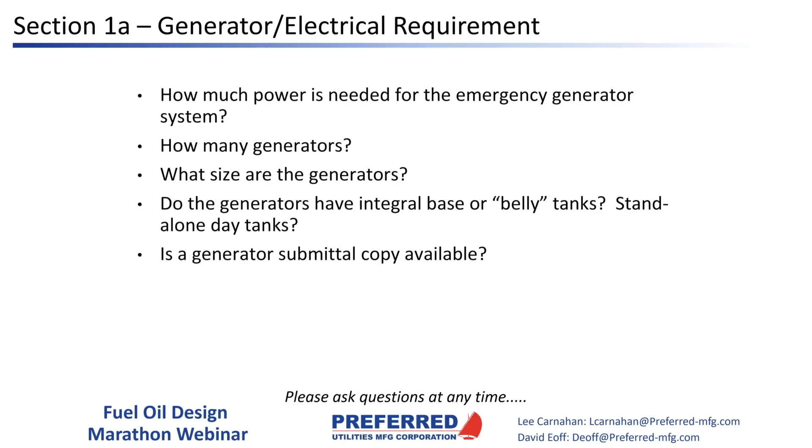And a very valuable piece of information in the submittal copy a lot of times is information about the belly tank. Belly tanks are becoming more and more popular, and we'd like to see the actual belly tank drawing if possible, because that tells us how deep the belly tank is. In other words, what kind of sensors we can use, how big the bungs are, how many extra bungs there are, etc. So as early as possible on the generator submittal is actually quite valuable. So we usually are going to ask you for that up front.

Next thing being the runtime requirement. Basically, how long do we need to run the system? Life safety is, I'm sure most of you know, usually about 8 hours minimum. Hospitals are generally these days going to be 72 hours. Data centers usually, I mean, we've seen 24 hours, we've seen 72 hours. I would say a lot of the ones we're working on these days are at least 72 hours. We've worked on ones that have been 10 to 14 days.

So it really depends. Actually working on a project right now that has not been design complete yet, but we're looking at running generators for multiple months. And in Florida now, nursing homes are required to have 120 hours of fuel storage. So it really just depends on where you're at in the country or where the facility is at.

Depending on the scenario, fuel trucks may or may not be running. Say a natural disaster like an earthquake - it pays to be cautionary to that kind of situation, because you may have a response contract with a fuel supplier that says they'll be out there within 72 hours to refill your tanks. Well, a lot of that can change.

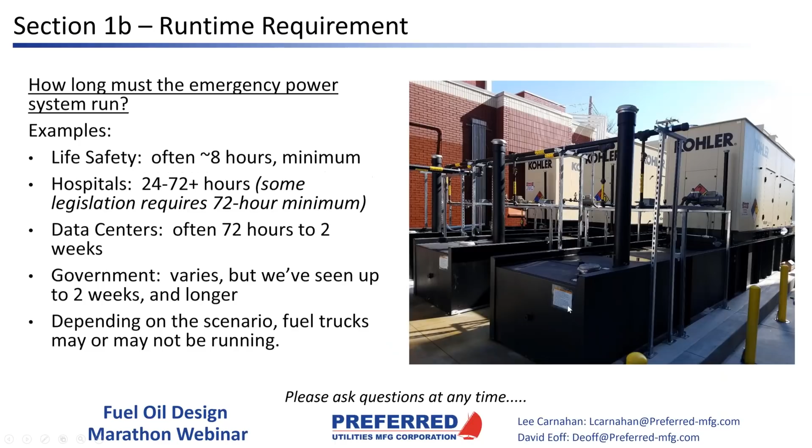I apologize for that, my mouse is a little bit sensitive. I won't use that anymore.

The next thing we're going to look at is above ground versus underground tanks. As you can see, there are advantages and disadvantages of both. It really is just which one is more appropriate, but above ground generally is simpler, it's less expensive, it's a little bit quicker, and it's obviously less disruptive to the site as far as excavation goes.

There generally aren't going to be any significant thermal issues, but it could happen in really extreme climates. Part of the limitation here is limited capacity. You can get approval to do much larger than 48,000 gallons, but generally 48,000 gallons aggregate is the limit.

We've run into sites in the past where neighboring sites, such as residential areas that have two-story houses that can see over fences, like at VA hospitals and stuff, we've run into situations where people have been sensitive to having exposed fuel tanks, and so that might be a reason to move to an underground tank as well.

Underground, obviously, is a lot more complex and more expensive. The complexity in California in particular is quite a bit different. We have AB 2041, LG 113, a lot of different codes and everything that need to be followed, and obviously very different equipment. They're also a little bit more difficult to inspect. Maintenance requires certified inspections by certified individuals, etc.

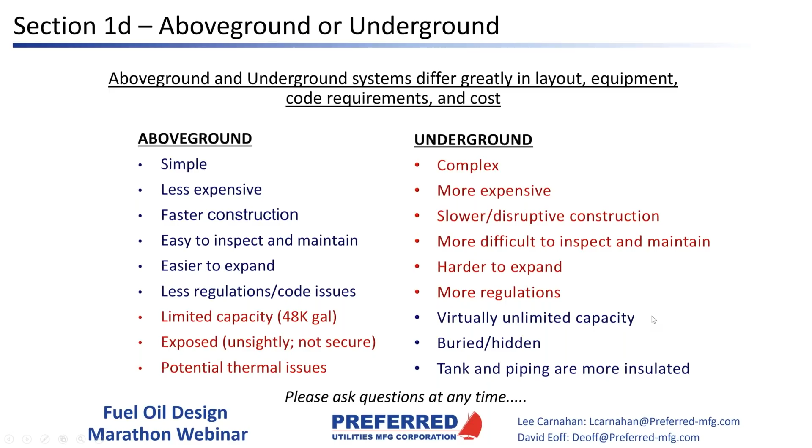They're generally a little bit harder to expand. So if it's a modular growth type of thing, above ground's a little easier. Obviously also more regulations, and the advantage though is that you have virtually unlimited capacity. They are hidden, and the tanks and piping are more insulated from extreme environments. So again, it's just really going to be what is more appropriate for your particular project.

Lee, isn't it true in a lot of cases the decision of above ground or underground storage tank has already been made by the time the project gets to the engineer? I would say probably most of the time, but in some cases not so much, especially if it's a remote site that's, say, a new data center. Sometimes there's some flexibility there, but we've also switched from above ground to underground or vice versa in densely populated, like downtown areas where it ends up just not working. We just can't do it for some reason. We can't excavate that particular sidewalk, or we can't block the street, something like that. So yeah, generally I'd say it's usually mostly decided ahead of time, but sometimes it switches up.

Has that been your experience a little bit here and there? It seems like I do more hospital projects than data centers, and it's usually the architects that decide early on in the project where the main tanks are going to go. Yeah, for sure. And I found if people complain that the main tanks are ugly, sometimes they'll put the logo of a local sports team on the side of the tank, and then people consider them to be less ugly. Yeah, we've had a couple of VA sites that have put decals and painted the entire tanks and made them look pretty nice. So yeah.

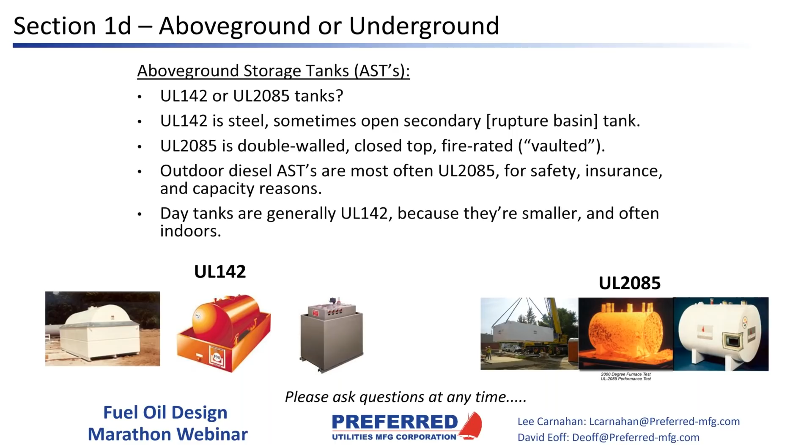Day tanks are generally UL 142 because they're smaller, usually indoors or often indoors. A good rule of thumb here is UL 142 is generally going to be up to 660 gallons, usually used as day tanks. When you go over 660 gallons, you're usually looking at UL 2085. Also, if you're exceeding that capacity and it's within a building, they're usually going to require UL 2085 as well. So a good rule of thumb is day tank under 660 gallons, or even a main tank under 660 gallons, UL 142 is okay. Once you go above that, in most cases, it's going to be UL 2085, protected class tank.

I'm going to try and go a little bit quicker, so if I'm going too fast, let me know. Underground storage tanks are going to be double wall these days, either fiberglass double wall or composite, which is a steel primary and fiberglass secondary. Pressure systems, some states, like California as an example, where I am, require continuous monitoring systems for tanks and underground piping. That's the pipe interstitial as well as the tank interstitial.

Fiberglass tanks are going to be monitored generally by brine or polyglycol, and composite tanks are usually going to be continuously vacuum monitored. The piping in the state of California, for example, the secondary will be continuously vacuum monitored in most cases.

As far as sumps go, in California everything needs to be double walled if it's a pressure type system, meaning you've got pumps in the tank pushing the fuel out. In other systems that are suction, if we have a length of pipe that's underground, we can use single wall sumps because that is the secondary containment for the piping. There are a lot of variations, and I know everybody's from all around the country, so I'm not going to go into too much depth on the particulars, but we will assist you with making sure your system is appropriately contained for your location.

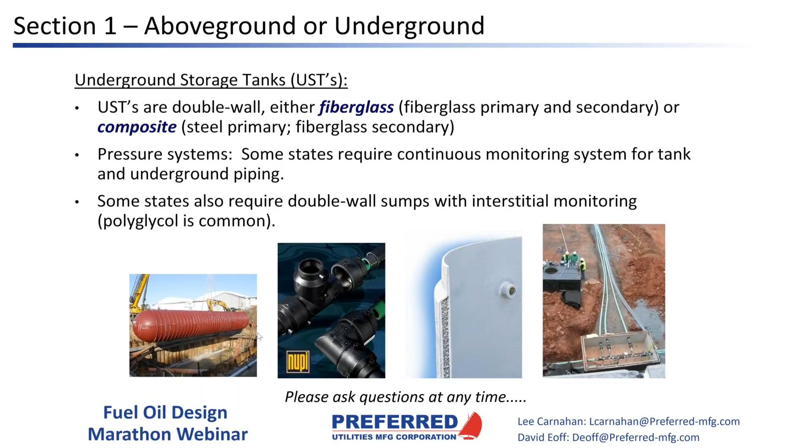So component locations - basically where are the ASTs or USTs located on the site versus the locations of the generators or the polishers, the controllers, etc. How far do we need to run the pipe? And of course, are we intersecting any roads or sidewalks? Do we need to go underground, overhead, that sort of thing.

And also, of course, if this is a high rise with a generator on upper floors. Once we get up to a certain height, depending on the types of pumps we're using, we may need to actually switch the types of pumps we're using, or we may need to use an intermediate arrangement with mixing different types of pumps.

Without going into too much detail, basically gear pumps are going to push a lot of pressure, a little lower volume. Submersible pumps, like you'd use on a typical hospital system with underground storage tanks, move a lot of volume - they're high flow but won't push a lot of pressure. They won't push a lot of head feet to get up to upper floors. So that's another thing we're going to be looking at as far as where these different components of the system are located.

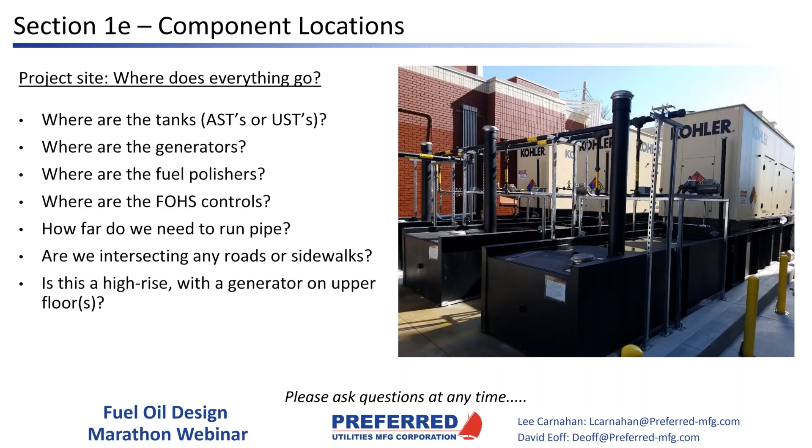So section 2, you want to take over here, Dave, for a little bit?

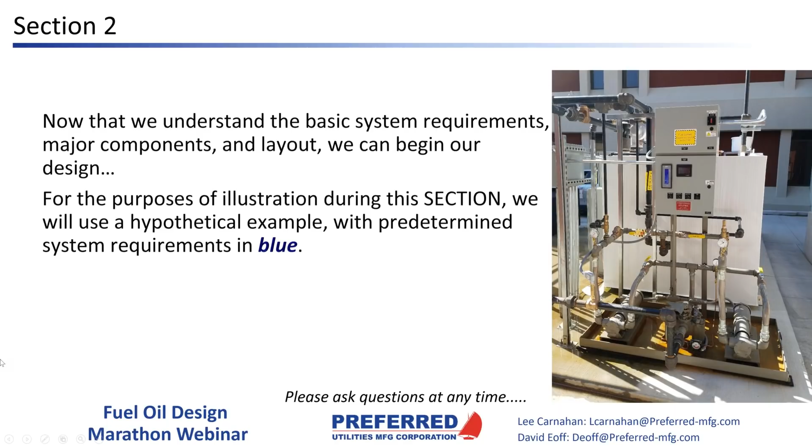Sure, go ahead and advance the slide. We're going to go into some detail of where these components should be installed, and the way we're going to do that is by going into some fuel schematics and building up a fuel schematic one step at a time.

But we're going to start with working through an example of how you would come up with the amount of fuel you need for a storage system. Lee talked earlier about how the amount of fuel you're required to have on site can be dictated by state or local code, company policy, or it could be up to the engineer. In this case, we're going to use 72 hours as our desired runtime.

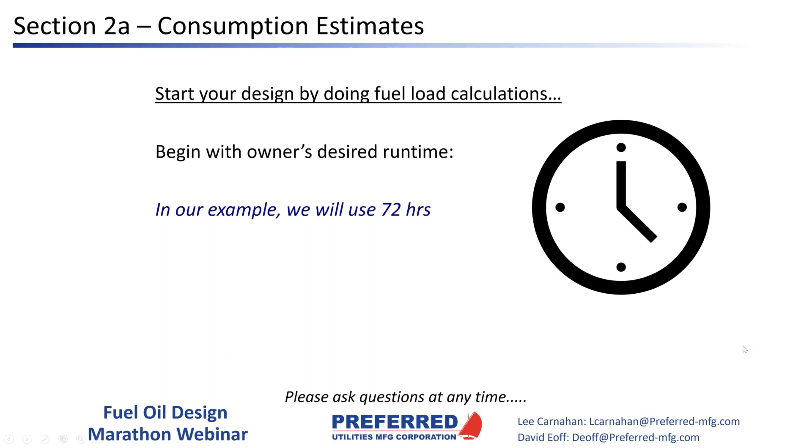I apologize, I don't know why it's not advancing. Just give me a second here. Okay, there we go, sorry about that.

So in this example, we've got 4 2-megawatt diesel generators and a runtime of 72 hours.

Now there's a handy formula for determining how much fuel consumption you're going to have with each generator.

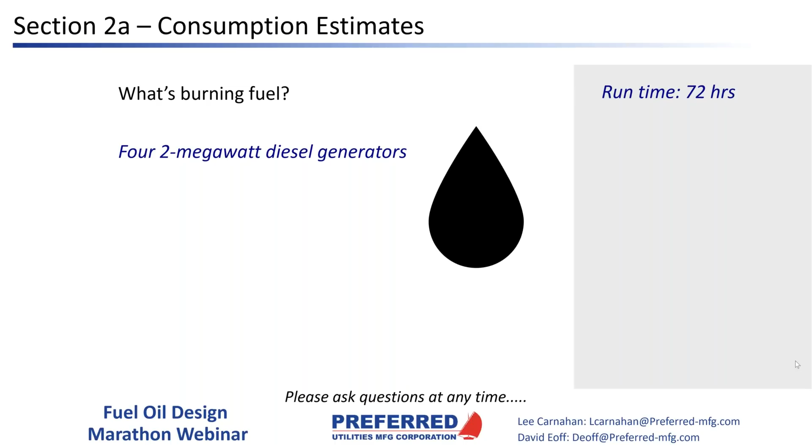There we go, sorry about that. I don't know why it's not advancing. There you go, all right.

The rule of thumb is 7 gallons per hour per 100 kilowatts. Or, I seem to like the math better - I just take the watts and multiply by 0.07, and that gives me the gallons per hour. The cool thing about this conversion is it doesn't really matter what type of generator or who the manufacturer is - they're all going to be pretty close to 7 gallons per hour per 100 kilowatts.

Well, there we go, sorry.

So each of our 4 generators is 2,000 kilowatts, and using our 7 gallons per hour per 100 kW, you get 7 gallons per hour times 20 is 140 gallons per hour per generator. So each generator is going to consume approximately 140 gallons per hour.

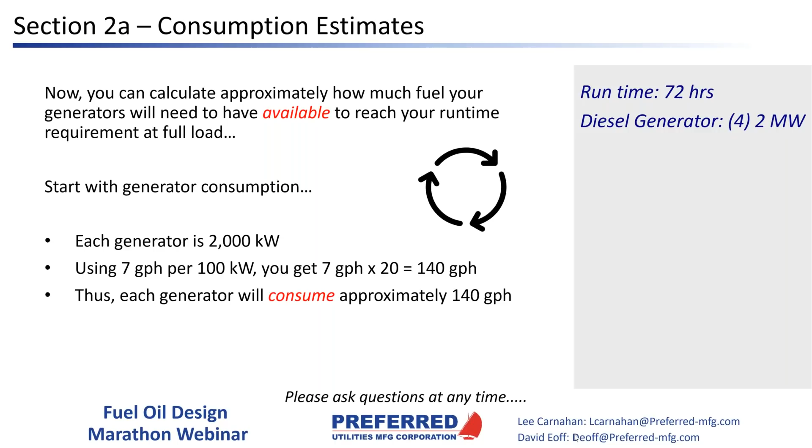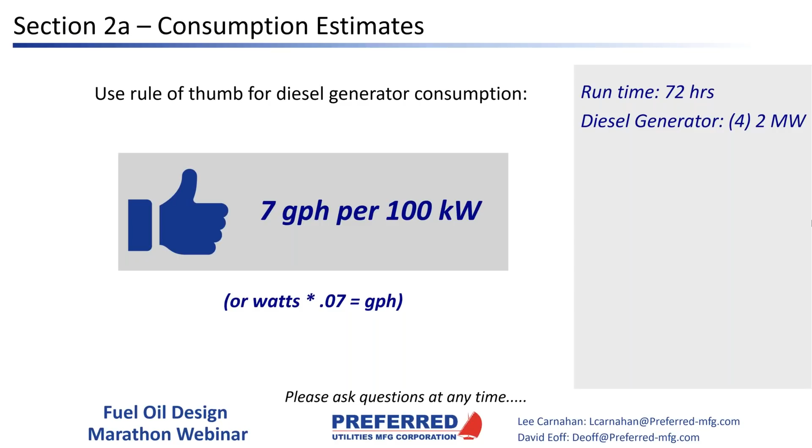Dave, I'm going to hand over control of this to you because for some reason it's funky when I try and advance the slide. Okay, I'm not even sure it's going to let me advance the slide since you're the presenter.

The perils of live slideshows. I know, we usually record these things, and now I know why. My standard in the past was I always wanted to have better technology than the Joe Biden live webinar. And usually we pull that off, although it didn't seem to hurt him any in the long run, did it?

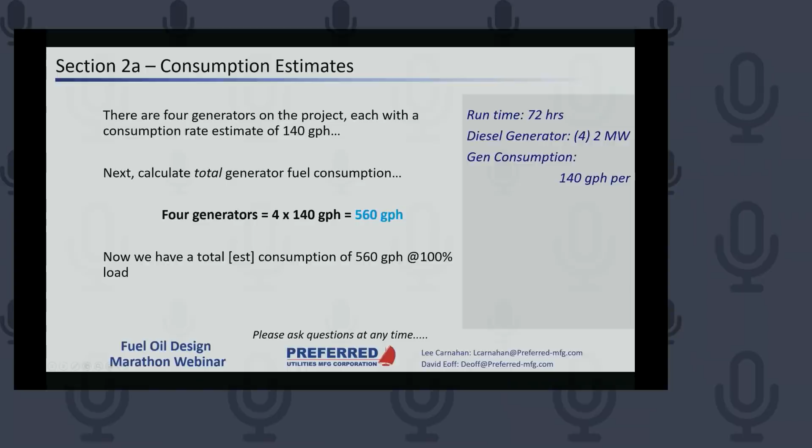This is going to end up being you're going to have to launch the presentation and everything. So yeah, that's why I'm stalling. I've got the presentation going on my screen now. Are you good, David? I think so. Okay, we'll see if my enter button works. If you need a couple seconds to get stuff, we have some questions, just let me know. All right, I'll tell you what, we'll work through this section and then we'll take the questions we have. Okay, great, we'll leave you in control of the presentation too from now on. All right, we'll even see how that takes over.

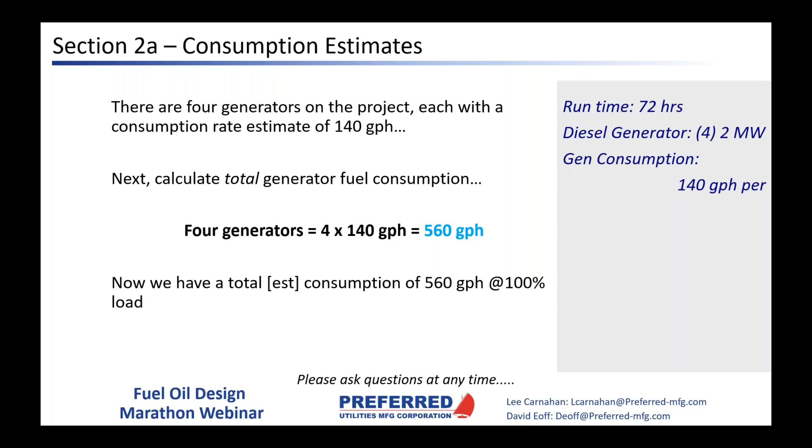Okay, so in the previous slide, which seems like days ago, we calculated 140 gallons per hour per generator times 4 generators in our example. This is math I can almost do in my head. We're up to 560 gallons per hour of total consumption.

All right, my enter button works. So now 560 gallons per hour times 72 hours is 40,320 gallons. And we're almost there. We need 40,000 some odd gallons of usable available fuel.

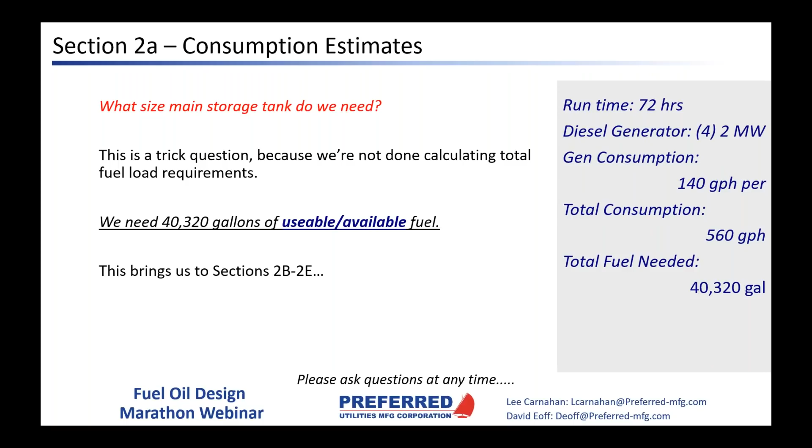That doesn't mean you can go out and order a 40,000 gallon tank, because there's two things. There's ullage - I think that's the right way to say it. You can't fill a main tank up 100%. In most jurisdictions, the fire marshal is going to tell you you don't fill that tank up above 90%. And when they come out and inspect a new tank, they want to make sure that alarms go off and valves start to close when you get to 90%. So you can't use the top 10% in a main storage tank.

Also, the drop tube doesn't go all the way down to the bottom of the tank. We typically leave about 10% on the bottom of the tank. The reason for that is if you get any water in the tank, and these tanks are vented to atmosphere, so they will accumulate water. The water is heavier than the oil, so it's going to go all the way to the bottom of the tank. And the water can contain bacteria that will eat the oil and produce sludge, which is going to live right in the boundary between the water and the oil. So we want to keep that level below 10% so it doesn't get to the drop tube.

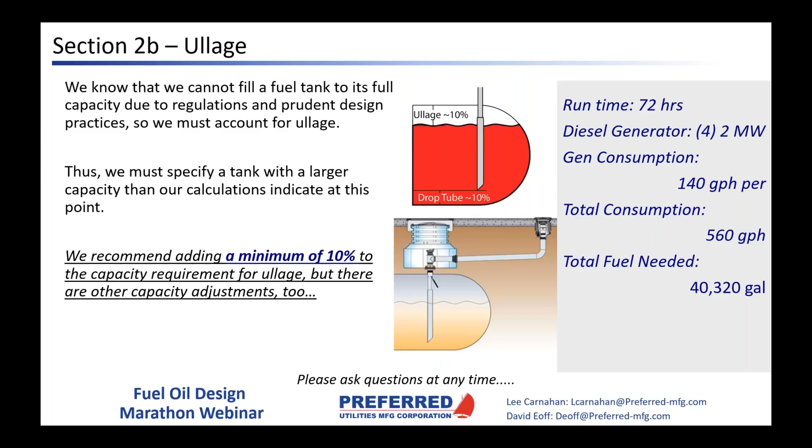By the way, if we do a filtration system or a fuel polisher, the drop tube for the fuel polisher will go all the way to the bottom of the tank, because that's where the water and the sludge is. But the drop tube for your transfer pumps usually stops about 10% up, so only typically about 80% of the total volume of the tank is usable. For the transfer pumps, the drop tube gap is usually about 6 inches. For the polisher, it'll go all the way to the bottom and end in a T, or sit about 4 inches above the striker plate.

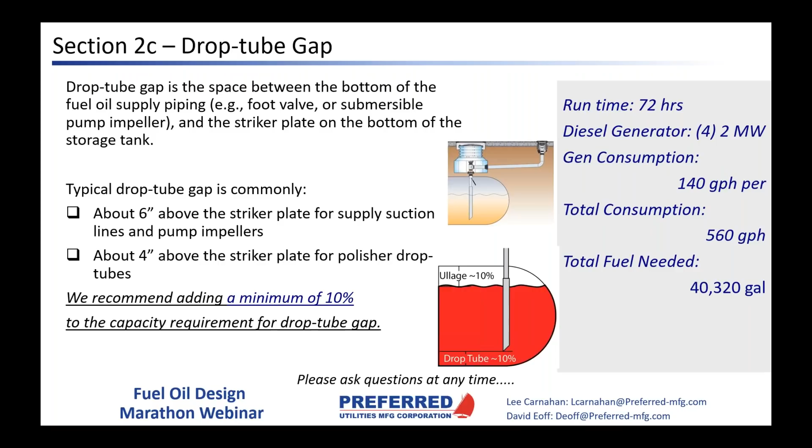You also get to use the oil stored in the day tanks as usable fuel as well. So if you're not quite up to your 72 hours or whatever is mandated at the plant's location, you can count the fuel in the day tanks towards your 72 hours. Day tanks are usually limited to about 660 gallons, but belly tanks on outdoor generators are virtually unlimited. I've seen belly tanks be 5,000 gallons, so that can be a significant amount of fuel stored right in the belly tank.

You need to be careful with this. There was a company in Dallas recently, a major calculator manufacturer. They had a fuel system for one of their buildings that had a large day tank and a small main tank. They filled their day tank, and then they had a truck come in and top off their main tank, so everything is full.

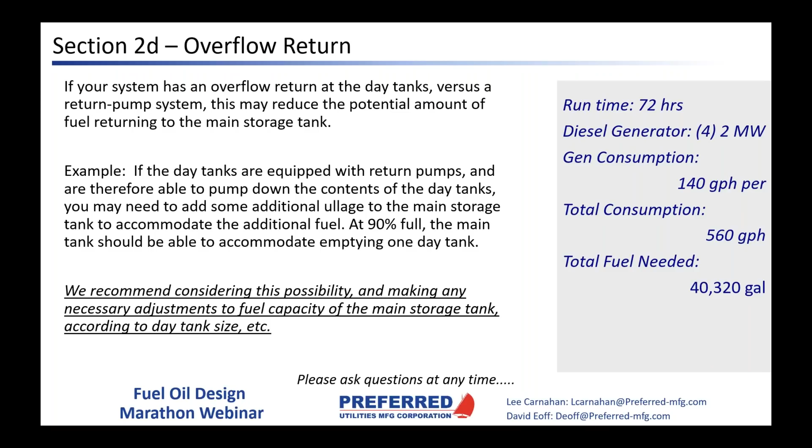Another thing to consider is that in some jurisdictions, you can't have what they call a wet fill pipe. Especially in high-rise buildings, you sometimes have to use a dry fill pipe. So after you've used that fill pipe to fill a main tank or fill a tank on the roof, you have to drain that fill pipe because they don't want the oil sitting in that fill pipe. So that volume has to be taken into account as well.

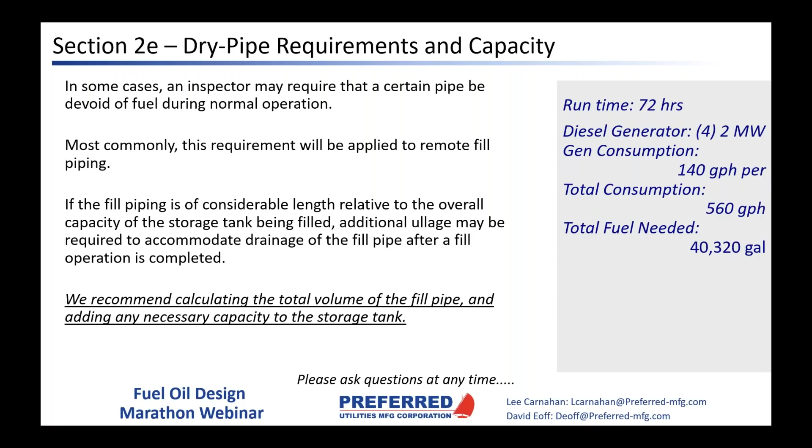So summing all this up, in our example, we needed about 40,000 gallons of usable fuel. We've got 10% of ullage at the top of the tank we don't get to use. There's 10% of the fuel at the bottom of the tank that we can't get to because our drop tube doesn't go all the way down. And then you might add 5% or so for generator testing or exercising the fuel system. In this example, that gets you up to 50,400 gallons.

Now, that being said, in an emergency, I don't think anyone has ever said that they had too much fuel. Our representative in Puerto Rico, Mario Franciscini, said he spoke to many facilities after Hurricane Maria, and a lot of them wish they had more fuel storage on site because it took a while for the roads to clear, and then even when they did clear, fuel truck deliveries were intermittent. So when possible, and when you have the space, round up.

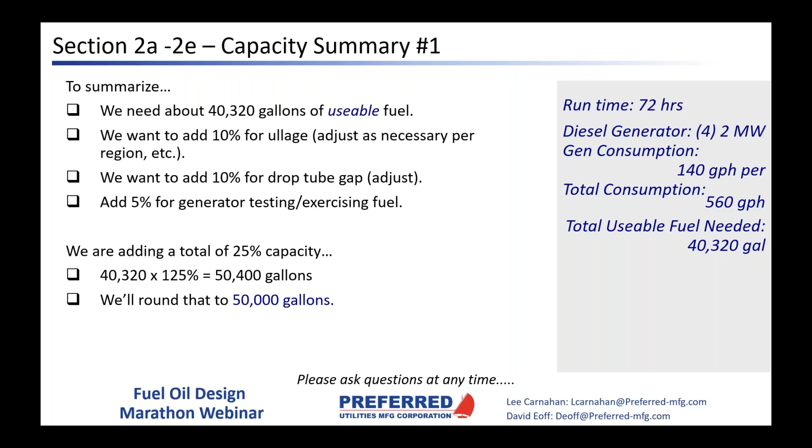So if you have large day tanks, you can use the fuel in the day tank towards your desired runtime. In this example, we're using 1,500 gallon belly tanks. So 1,500 gallons times 4 times 80%, because you can't get to 100% of the fuel in your day tank either, comes out to 4,800 gallons. To be conservative, I round that down to 4,000 gallons. Then instead of 50,000 gallons to meet your 72 hours, you would only need 46,000 gallons for a main storage tank. Although if it were me, I would probably round up anyway and get back to a 50,000 gallon tank.

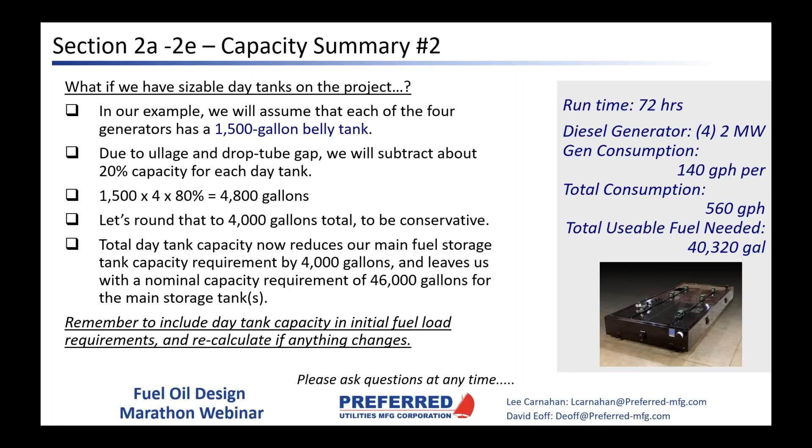All right, so hey, I just wanted to interject something real quick here. Some jurisdictions, like out here, we can go 95%, but I would still use the 25% number to make sure that you're well covered.

And I wanted to mention one other thing too, and that is, for example, OSHPD hospitals out in California, they need 133% nominal capacity. So I would keep that in mind. If you're working on an OSHPD hospital, we go even over and above the 25% extra. So I would keep that in mind. And then on top of that, of course, that's a minimum. So if you want to exercise your generators, we definitely want to throw some extra fuel on top of that, so every time we exercise the generators we don't have to order more fuel. We want to have some extra fuel there.

So that 133% is just a safety factor that OSHPD requires? Yeah. And I think it's an excellent idea.

I wanted to mention one other thing. One of the comments we've gotten in the questions section, Nicholas mentioned that Tier 4 data centers require 96 hours of backup. So that's a really good thing to know. If it's Tier 4, it's going to require 96 minimum. And again, extra fuel on top of that is great because that's the bare minimum. But I just wanted to say that was a good comment as well.

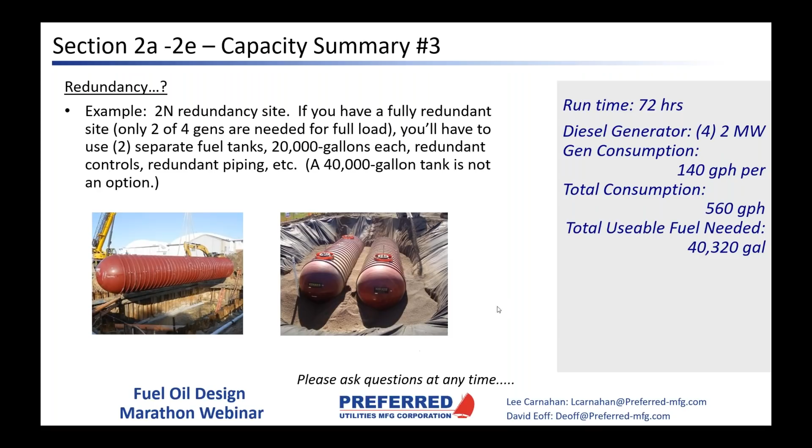Do you want to go over some more questions before we start? Keep going, David, or? Sure, go ahead. All right, so we did have another question.

It says, will an above ground tank with a UL 2085 rating installed inside a building be required to be installed in a 2-hour rated room? So if a 2085 is installed inside, is it required to be in a 2-hour, I'm guessing, fire rated room?

I would say generally yes, and you'd also probably have a size limitation, which out here usually is 3,000 gallons max. That's really a question that can vary - the answer depends on where you are and the authority having jurisdiction. That's one of the things they're going to want to weigh in on. Keep in mind, I'm from California, Dave's from Texas, so the answers you're going to get out of me are usually going to be the most conservative. So just take that with a grain of salt. Here in Texas, you can get away with a lot more. I mean, the oil came out of the ground, right? What's the harm of putting it back in?

Another question we had is, can you talk a little bit more about interstitial monitoring? So I know we talked about that earlier, but Lee, do you have any extra comments on that? Interstitial monitoring, there's going to be the interstitial on the tank.

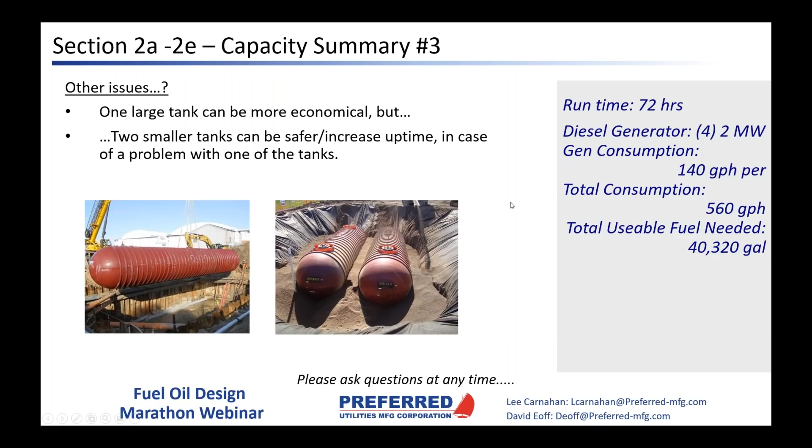If you lay this out in a data center type environment too, and loop it around, as long as you have a map of the cabling, you could pinpoint a water or an oil leak on a grid, and know exactly where, hey, there's a hole in the roof and it dripped through the false floor, that kind of thing. So it's pretty handy stuff.

So the next part of our example here is we're going to start looking at the piping layout, and a typical suction type system with an underground tank, which is not all that popular, but it does definitely occur. We definitely do these every year. A typical suction piping layout is you have a foot valve in the underground tank, and you're actually physically pulling the fuel through a suction line up into the pump set.

So there are things you want to look out for here. You want to make sure that you can maintain prime. A priming apparatus of some sort, like a priming tee, can be handy here. You want to make sure you have a good foot valve, and obviously a good pump set, usually positive displacement, that will be able to self prime and purge air and that sort of thing.

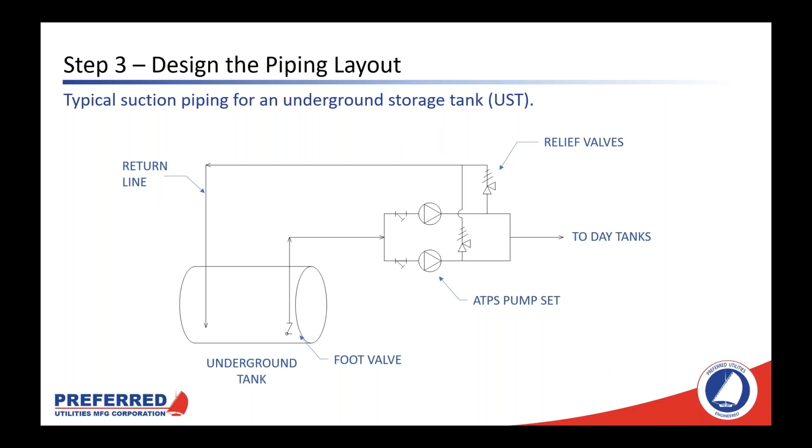At that point, you also have on the pump set a relief valve, which you can see in this slide as well. In case there's a blockage, somebody has a valve closed, or there's some sort of issue going on, the relief valve will tie the discharge of the pump set back into the return line to make sure that we don't overpressurize anything.

Above ground tank, very similar. You just have a little bit easier time as far as suction lift, but basically the same arrangement there. We're going to look at, of course, all the usual pipe friction loss and that sort of thing, but we're also looking at suction lift. Specifically in the case of having an AST above ground, where you've got the tank higher than the pumps, we have to have an anti-siphon valve.

This is often overlooked or inappropriately placed. The anti-siphon valves will only work on the suction line. So we have to literally orient the valve in a specific way, and the fuel needs to be pulled through the anti-siphon valve. There's not going to be any sort of anti-siphon valve on the discharge line, which of course makes sense. But they're going to be required on these AST systems.

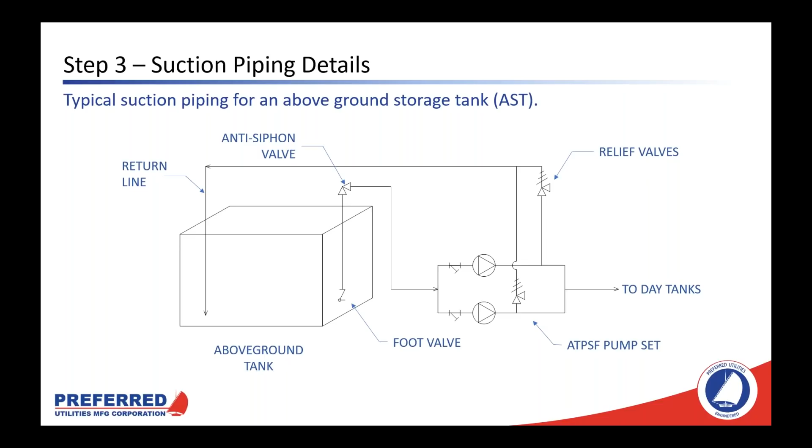You run the risk that if you get a leak in that fuel system, you can siphon oil out of the main tank. The leak could be something as stupid as a union that's not tightened up all the way, or a flange that's not tightened up, and that'll drip out and siphon oil out of the main tank. Every fuel tank, above ground or below ground, has fuel introduced or removed through a drop tube that goes down to the bottom of the tank. That creates an obvious risk of siphoning out the entire tank if that pipe were to break.

The only variation on that is if you have a physical day tank overflow. Let's say you've got an underground tank and you don't have return pumps—in order to prevent overfill, you have an opening at the top of the day tank, and a continuous downward slope back to the underground storage tank. In most cases, that's the only time where you're not actually introducing or removing fuel through a drop tube that goes to the bottom of the tank. So that's why we have siphon precautions.

So if we have multiple main storage tanks, it's basically the same arrangement, but we have motorized ball valves. Essentially, they're referred to as tank selector valves. This is a fairly popular solution. Many of you who are watching this have probably dealt with this and seen our designs on it.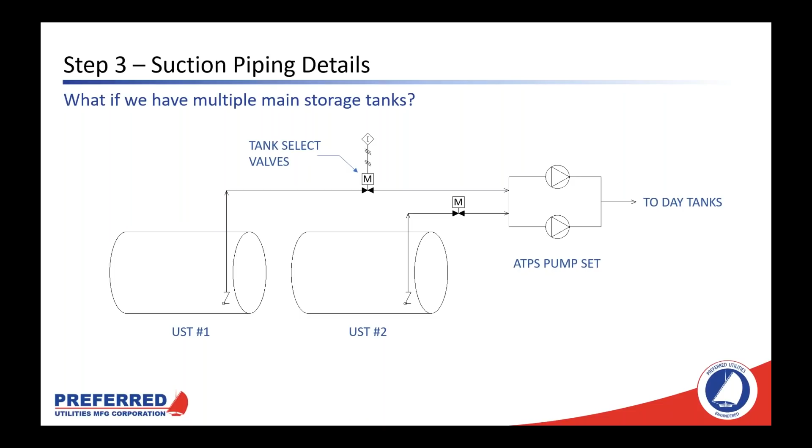So discharge piping, typically, from a pump set, will go straight out to the day tank. The flow switch, however, if it does not make when the pumps activate, that'll tell the controller there's a problem, there's a potential pipe break, something's wrong. In most cases, it will try and switch over to the lag pump.

It'll try the lead pump first in a duplex system. It'll say, hey, maybe the pump isn't working, I'll try the lag pump. If the lag pump fails, then it's going to send out another alarm. It'll say, okay, pump one failed. That'll be alarm number one.

The flow switch still doesn't make after the lag pump. It'll say, hey, there's a problem, you need to check this. Is there a leak in the pipe? Did somebody break the pipe with a forklift or something like that? Or did somebody just close the hand valve so that we can't move fuel? Did somebody shut off the ball valves altogether?

Yeah, I'll take this slide, Lee. Okay, so I've been doing this presentation for a while, or a version of it, and I realized I was leaving out a very important part - I hadn't drawn in the engine fuel pump, which is a really important part of the system. I've drawn it outside of the generator enclosure because it's easier to draw, but actually that fuel pump is inside the generator enclosure and attached to the engine.

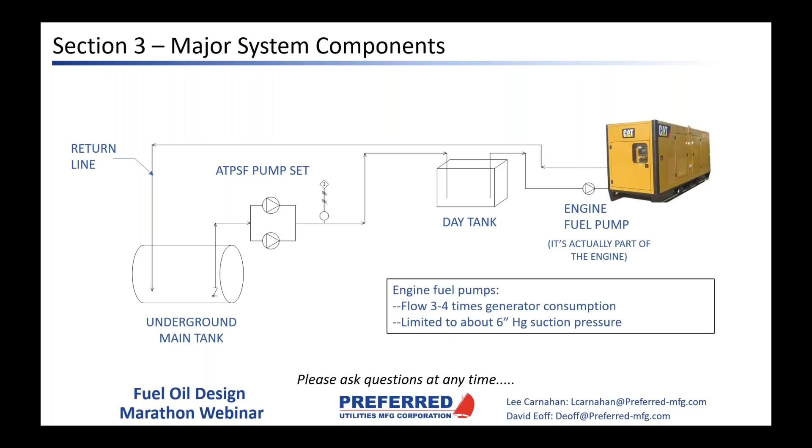And the only concern there is that now the transfer pumps have to keep up with all of your connected engine fuel pumps. So adding on to the fuel schematic, if we have more than one day tank, we simply put all the day tanks on a supply header.

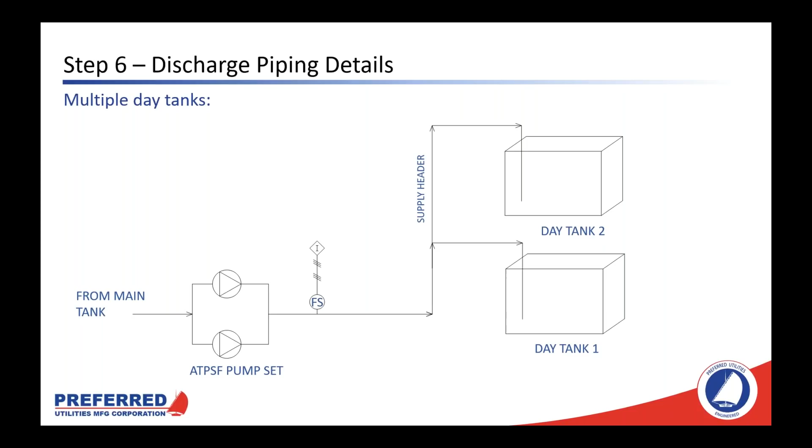So we're going to pipe them basically in parallel. And then to make sure we only get fuel to the day tank that's calling for fuel, each of the fill manifolds on the day tank will include at minimum a normally closed solenoid valve. The sequence is, when the day tank calls for fuel, we'll bring on a supply pump, we'll prove flow in the supply pump, we energize a solenoid valve for that day tank, and then we top off just that tank. And that fill manifold, sometimes it really is just a solenoid valve.

Often there's a 3-valve manifold around that so that you could bypass the solenoid valve. Sometimes there's 2 solenoid valves. Sometimes the 2 solenoid valves are turned into 1 motorized valve. You might have a Y strainer there. You might have a sight flow indicator to let you see that oil is going into the tank. And you might even have a flow switch there so that we make sure if day tank 1 is calling for fuel that we actually detect flow going to day tank 1, which is an important thing. We can do any of those combinations, but most common is probably just a solenoid valve with a 3-valve manifold around it.

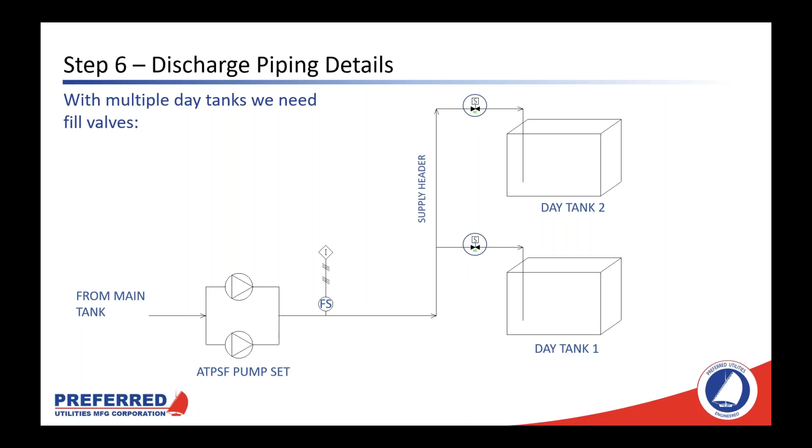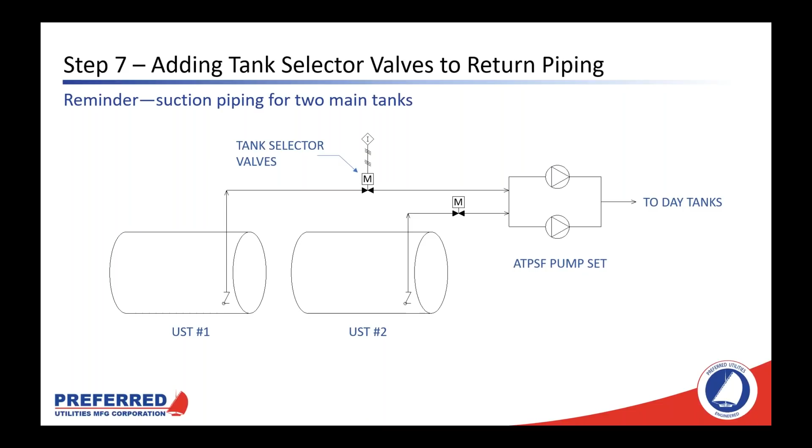So Lee talked about tank selector valves in the supply line. You also are going to need tank selector valves in the return line as well. And we highly recommend that if you're drawing from tank 1, that you're only allowed to return to tank 1. This makes the system somewhat intrinsically safe. And then what we'll do is, if the operator says, through our color touchscreen, if we're going to run on tank 1 today, we're going to line up the supply tank select valve and the return tank select valves for tank 1. Sorry, I'm in the middle of a webinar.

We like to use motorized valves because motorized ball valves are less likely to leak, and we can prove the position. There's a very large data center in San Antonio that had headered return lines and solenoid valves that leaked a little bit when there was pressure on the system, and eventually it leaked enough to fill a tank to 100% and overfill it. Fortunately, it was a 24-hour staffed facility, and the person on staff heard oil hitting the ground immediately, figured out what it was, and shut off the oil to that tank. So that's the reason why we usually like motorized ball valves in this situation.

We like to pull from and return to the same tank. It makes it intrinsically safe so that you can't overfill that tank. Some facilities want to use the transfer pumps to move fuel between main tanks, and we can do that, and we can interlock it to make sure that it's safe. But we would prefer to do it in more of an intrinsically safe system and not rely on a float switch to make sure we're not overfilling a tank.

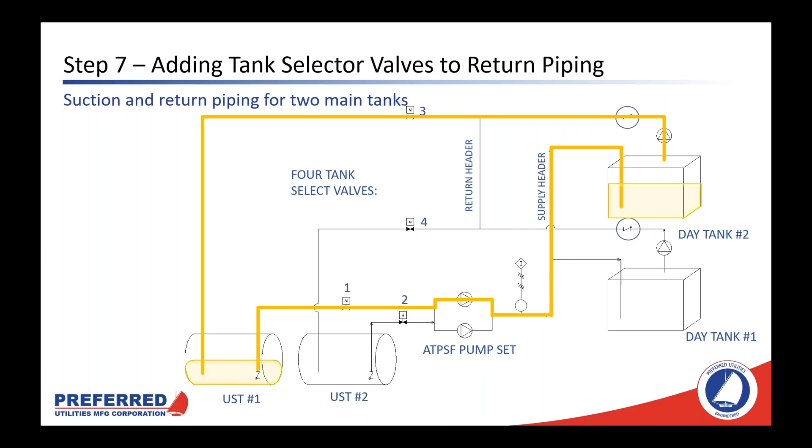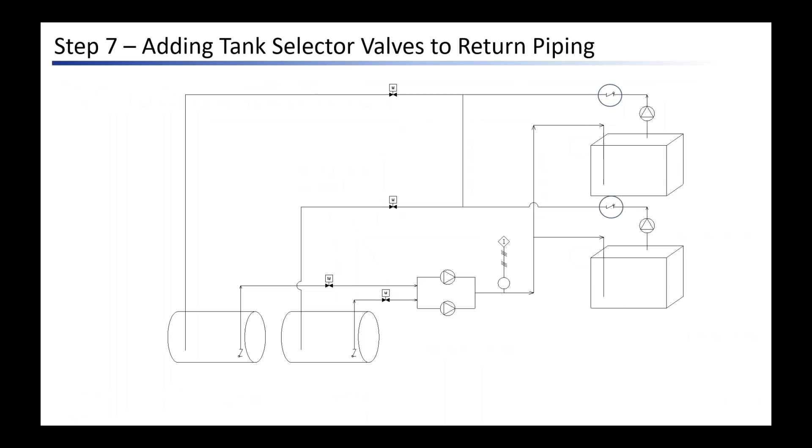Okay, I don't think there's actually any new information here on this slide. But our previous graphic artists figured out how to do these animations, and they're really cool.

You've got to be really careful about valves in the return line. The strict interpretation of NFPA code is you're not allowed to have any valves in the return line. But when you have multiple tanks, you need some way of directing fuel back to the correct tank. And when you have return pumps, you need a check valve there to make sure that you don't flow oil backwards and use the oil in day tank 1 to fill day tank 2. So we've got to be real careful about valves in the return line, and that's another reason why I like to use motorized valves, because the actuators have proof of open and proof of closure switches on them so that we can make sure our valves are lined up when we go to energize return pumps.

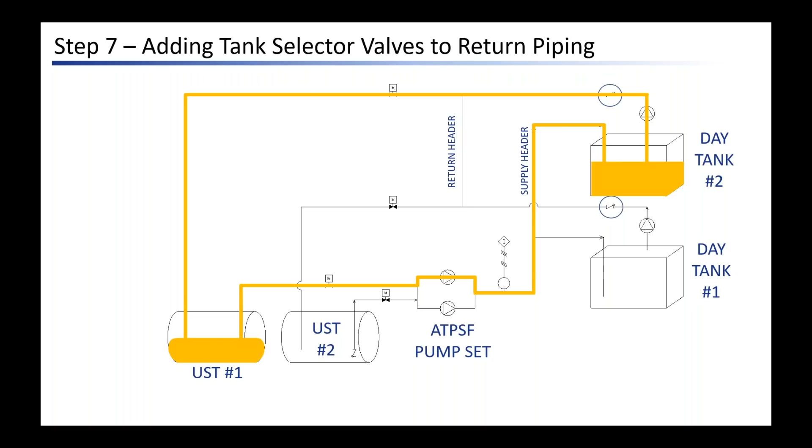This animation shows a typical control sequence. So the generator's using fuel. We typically put 4 float switches in a day tank - it's called a PLS4. The pump-on float switch is at 50% level. When you hit that 50% level, we open the fill valve to that day tank, energize the supply pump, prove flow, and fill it up to 80%. At 80%, we hit the pump-off float switch, and then your day tank is topped off and the fuel system just kind of goes into hibernation mode.

If you blow past the 50% pump-on switch and get down to the 40% switch, that's the emergency low. Now alarms start going off in our control panel and we energize both supply pumps because for some reason we didn't top off like we were supposed to.

And then on the other side, if for some reason we get past 80% full and go to 90% full, then the top switch in the PLS4 breaks. That sounds an alarm because it's an upset condition, and we will cut power to the fill valve shown there in the schematic, and we'll activate a return pump. When we cut power, it's actually a hardwired thing that can't be overridden by the operators. So if you've got a day tank that's 90% full, you won't get power to that solenoid valve.

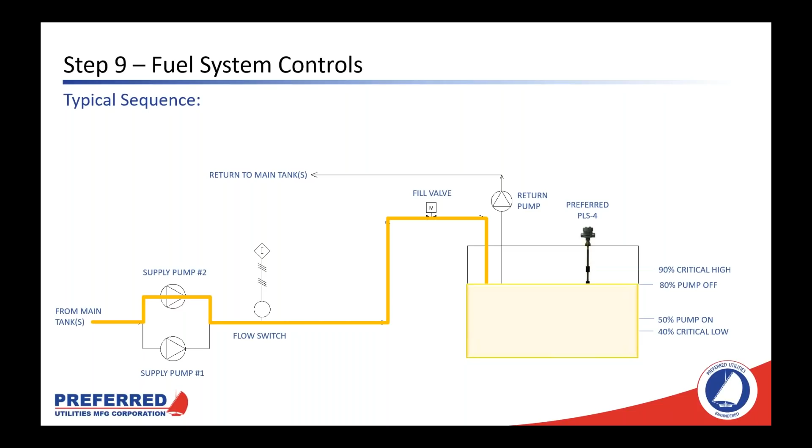I also do boilers, and for boilers we'd go back to a headered system like this, and we'd probably put a back pressure regulating valve on the end of that supply header to maintain the pressure we need through the whole supply loop. Boiler projects are usually simpler than generator projects, but the one difficult thing is some boilers have onboard pumps like generators do, and need oil between slightly negative to slightly positive, and the onboard pump on the boiler will just draw off of that header.

Some boilers have no onboard pumps at all, and then that supply header may need to be charged as high as 100 psi for a fire tube boiler, or even 150 psi for water tube boilers. So if you're not sure what the flow and pressure requirements of your boiler project are, just let us know the make and model number of the burner, and if we can't figure it out by Googling, we know people at all the burner manufacturers and we'll call them to find out the requirements of their burner or pumps.

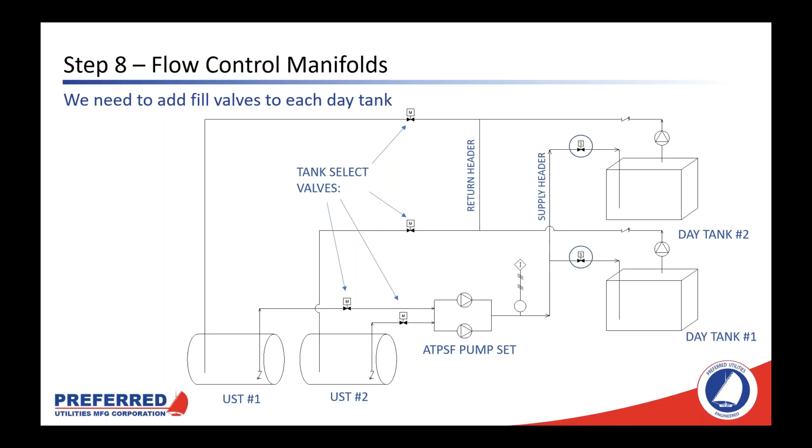Okay. Lee, go ahead and take it from here. I think these are the slides that you put together.

Okay, so at this point we're really going to start looking at the major system components now that we understand the layout, the piping, and that sort of thing. Depending on what we select here, this can affect the need for different types of subsystems, code compliance requirements, etc. Once we start selecting some of these components, that can affect subsystems like priming, suction lift, fuel velocity, etc. We haven't figured out the whole system yet — once we put the components in there, that can make changes.

For example, like Dave was talking about, returning the fuel back to the main tank versus back to the day tank is going to change things. It's going to change the size of the pumps, etc. So once we go into this, we may make some changes. Dave, you're still advancing the slides.

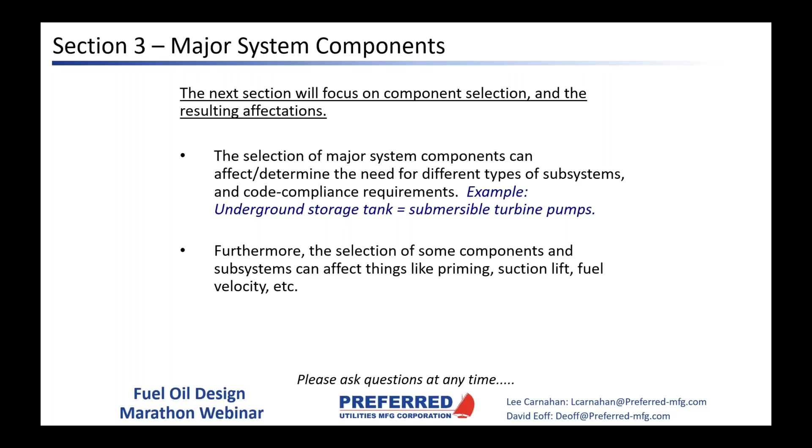First thing is we'll look at gear pumps. As I mentioned before, I'm not going to go into too much detail here. Gear pumps tend to be higher head, lower volume in general. You can certainly have high volume gear pumps, but these are really good for pushing fuel up to higher pressures. Like Dave was saying, on a boiler system that requires higher pressure, we need to use something like gear pumps. Also for remote fills or for shooting fuel up to a rooftop — could be 100, 300 feet — that's a good application for gear pumps.

They do require a suction line, so we've got a few different components there. We've got a foot valve, a suction line, and we may need an anti-siphon valve on that suction line because the fuel tank may be higher than the components. Since we've got that suction line, we have to achieve and maintain the prime.

So it's a really good idea in most cases to install a priming tee. A priming tee, for the most part, just consists of a high point in the piping where we put in a T that points upwards with a nipple, a ball valve, another nipple, maybe a cap, so we can unscrew the cap, open the ball valve, maybe spin on a funnel, and literally pour some diesel fuel into that suction pipe in order to prime it, or 'burp' the pipe, to get the air out of it.

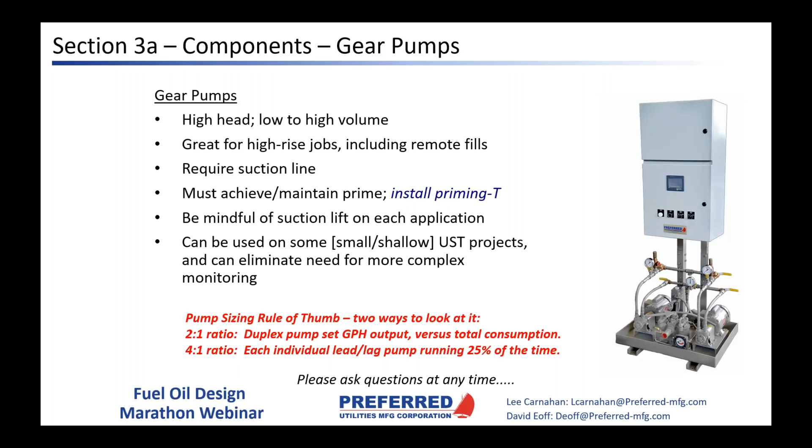Yeah, I should probably change that slide, it's my fault, but I said on small or shallow UST projects we can do suction systems. On larger underground tanks it's possible too. We're going to do some very careful calculations, mix and match pumps and motors and that sort of thing. So I should probably soften that last part of the last slide. We can do it on some of the larger systems, it's just a matter of being very careful and going through some pretty serious calculations.

You can use our online pump and pipe sizing program to estimate the suction at the pumps, whether you have an AST or a UST system. We're happy to also go over that with you and do any more calculations or anything, if that makes you more comfortable as well. We can certainly assist with that directly.

So obviously the other big pump selection possibility here are submersible pumps. The nice thing about submersible pumps, there's no priming issue. The impeller is actually submerged in the fuel, so it's always pressurized anywhere outside the tank, or at least the supply line.

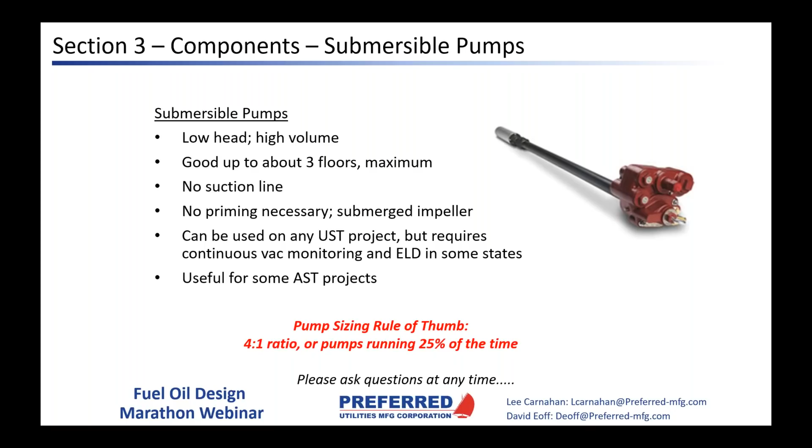You know, based on effective and efficient piping, pumping, but also could be a situation that's just a matter of real estate or something like that, or protection of the component. So we're going to take all those things into mind and make the right decision on what type of pump to use.

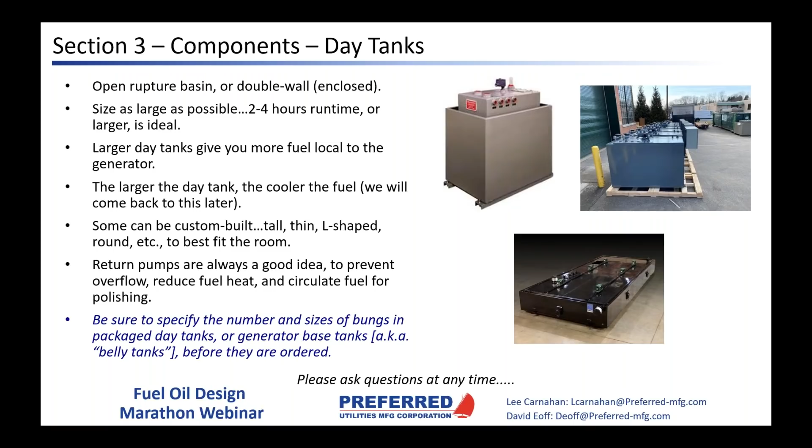So they're super convenient from a real estate point of view because they don't increase your footprint anymore, but they can be difficult to integrate with the rest of your pump controls. Yeah, that's an excellent point. We do run into that a lot. And I would say, my preference is try and get, that's why we like to see the generator submittal so early in the process.

Try and get as many bungs as possible so that we have spares. It's definitely our preference to install our own level sensors, just because it's easier for us, we have less field programming, that sort of thing. But also, if there's an issue at some point, and we pump fuel based on information that came from somebody else's level sensor, then the finger pointing starts. It's really good to have an integrated system with sensors from the same people who made the controller, so it keeps things a lot cleaner and simpler.

Direct draw systems are really interesting. Basically, in a conventional system like we've discussed so far, the generator is pulling fuel out of the day tank by itself, with an unobstructed line that the generator's fuel pump pulls from, circulates the fuel, and shoots it back to the day tank. A direct draw system is a situation where you might have a single generator, or maybe two or three, but the main bulk storage tank sits right next to the generators, physically very close. There's not really any point having a bulk storage tank and, say, three day tanks for three generators all piled on top of each other with a bunch of transfer pumps. As much as we'd love to build that equipment and sell it, if it's not the right thing to do, if it's not the most reliable system, we're not going to do it.

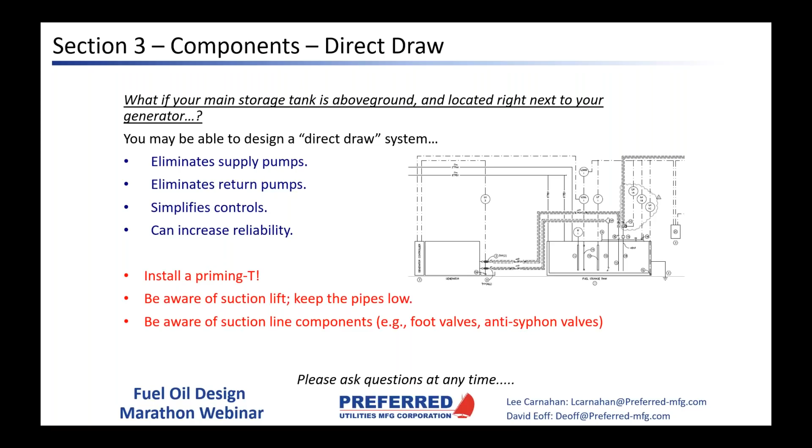So there's got to be a way for a fuel truck to get right to the main tank. In some facilities that can be designed so that it happens. In other facilities, it makes it impossible. So the main tank has to be somewhat remote from the generators just because of accessibility to fuel trucks.

And we can use remote fills, which is the next part of the section as well. So we may be able to remotely fill that tank. So for remote fill ports, there are three basic types.

On the left is not as common, but that would be an in-ground fill with just the fill pipe by itself under a little cover. But with any type of fill port, or even on a tank that doesn't have a remote fill, we have to have an overfill alarm panel. That's the thing right next to it with the bell on it that says preferred - that's an overfill alarm panel, for a single tank. That's going to be required on all of these systems. So if you have a very simple fill pipe only in the ground, you're going to see the configuration on the left. Again, not as popular.

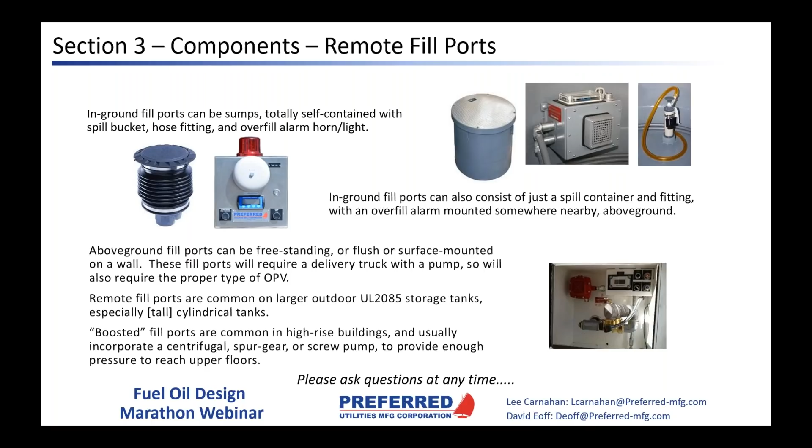We've looked, Lee, at how much fuel those little pumper trucks carry. I think generally it depends on the size. We've seen 500-gallon ones that are on something like a Ford pickup, but I think generally they go up to about 4,000 or 5,000 gallons.

Okay, so if you've got a big AST, it's going to take a lot of those trucks, or a pumped fill box, and you can get a gigantic gravity truck to come fill your tank all at once. Yeah, on something like a hospital or a data center, we may have a few semi trucks lined up that are gravity trucks, but that's why we have the offloading station that may have a very large gear pump, or even two gear pumps, with a larger fill pipe, like a 3 or 4 inch fill pipe.

Like you have out there in Texas at that big data center, the big government data center—it's got ten 40,000 gallon tanks, big offloading stations on that site, right? We're not supposed to talk about that data center, and there's a good chance they're listening in on this conversation anyway. We're not saying any names.

But yeah, on the larger systems, I'm working on a couple data centers right now where we really need to put—there's so many large above ground storage tanks, and it's going to take so many trucks, that we have to have these large offloading pumps and larger delivery pipes, just because you don't want a fill operation to take four days. But those are generally referred to as offloading pumps or offloading stations as well. So we didn't really get into that here. Maybe we should modify this presentation and include those, but yeah, they do exist.

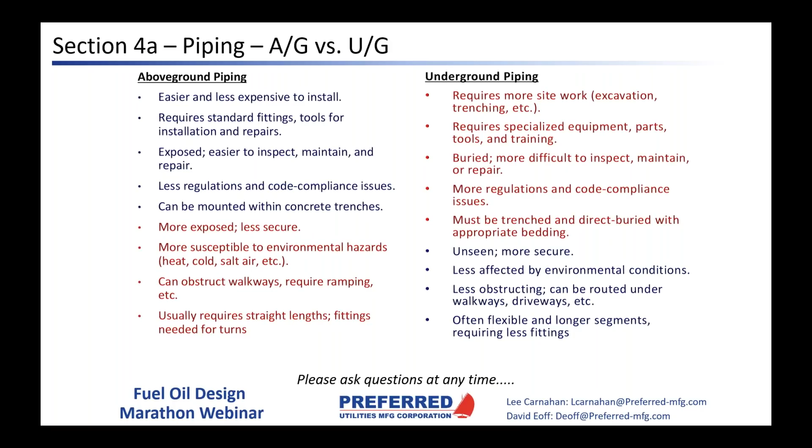Materials for above ground piping - we went over this a bit. Generally, these are generalities, but it's going to be Schedule 40 steel for above ground most often. Sometimes on government jobs it's Schedule 80, and sometimes there's a ballistic requirement where they go to Schedule 80. There are other materials too, like stainless steel, as well as poly-coated stainless steel, UV resistant, etc.

Something like an Omega Flex, or a Brute. But generally, it's going to be Schedule 40.

Secondary piping is generally going to be Schedule 10, but could be 40 or 80 depending on requirements. It may be multi-layer fiberglass, polyethylene, or a coated pipe - preloaded, double contained with a poly shield on the outside, etc. We're really going to be looking at these depending on each application.

Some of the poly pipes are only for use underground. Some of them are UV resistant, so we can actually install them in areas that may have direct sunlight. So we're going to look at each one of those.

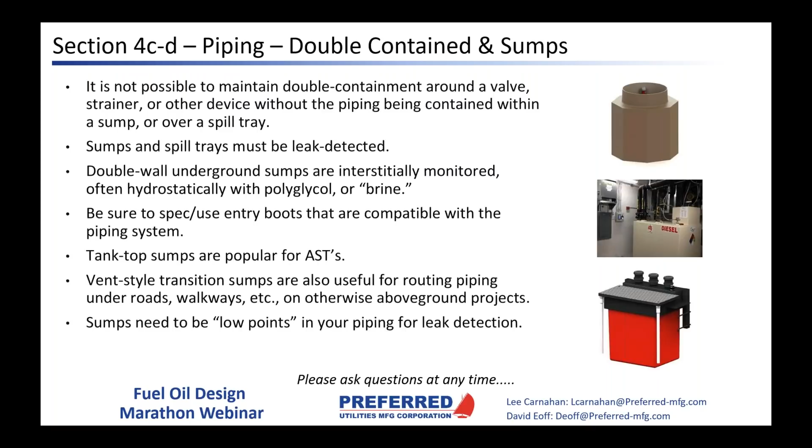Make sure to spec and use approved boots for whatever type of sump you're using. There are all sorts of different variations out there. We can certainly make recommendations that will work well for your project.

Pipe sizing, headers, and branches - this is an important part of the design process. If we have a situation with, say, 4 day tanks here for 4 generators that are maybe all the same size, we're going to have a larger header pipe to move fuel to all 4 simultaneously, but obviously only 1 generator will require a lot less fuel. So we size the piping based on how much fuel we need to move through this header pipe to all the tanks at the same time. But then each day tank branch off that header can be smaller diameter because we're moving less fuel to that one day tank. So when we assist with pipe sizing, we're also looking at the headers and branches.

We look at the main pipe and then all the little branches going off to the day tanks, so we give you multiple different pipe sizes. Reducing that branch size just makes it easier to deal with, easier to install - the valves are smaller, etc. So we look at sizing all of that accordingly.

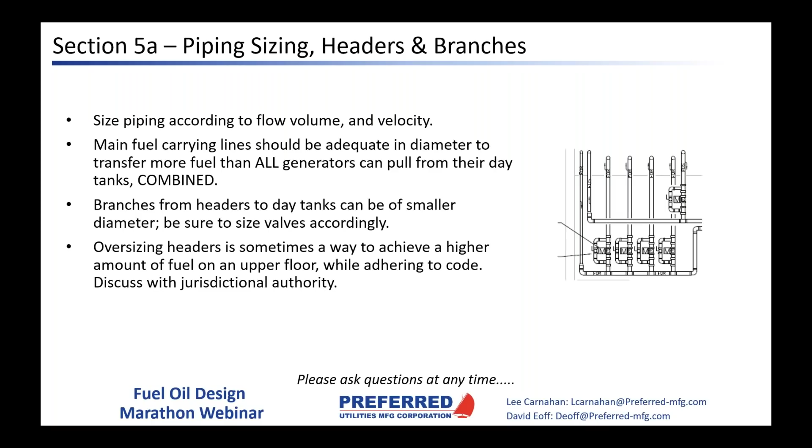That's a good point. One of the reasons we want to keep it under 7 or 8 feet per second is if it goes too fast and we're shooting fuel into a tank too quickly, with the pipe diameter not large enough, it could cause problems. If the velocity is too high when it gets into the day tank, it may foam, and if it foams the fuel you'll get funky readings from your level sensors, potentially. You could also swirl the fuel if it's a really small tank. So we take a very close look at the feet per second of fuel moving through the pipe - pipe sizing is crucial to making sure we're in the correct parameters.

On the supply piping suction side, when using gear pumps, we want to limit the suction lift, as we've discussed in the past. We like to limit that to 15 inches or less. It's possible to do more than that, but it starts making everybody uncomfortable. Typical piping friction loss is about 5 inches of mercury.

This leaves about 10 inches for static lift, or approximately 12 feet of oil. So when we're talking about a larger tank, like a 12-foot diameter tank with a 3-foot bury depth minimum, we start to get into an area where we really want to take a close look at it. I'll call the factory engineers, talk to them, look at the drawings, and get bigger brains than mine involved.

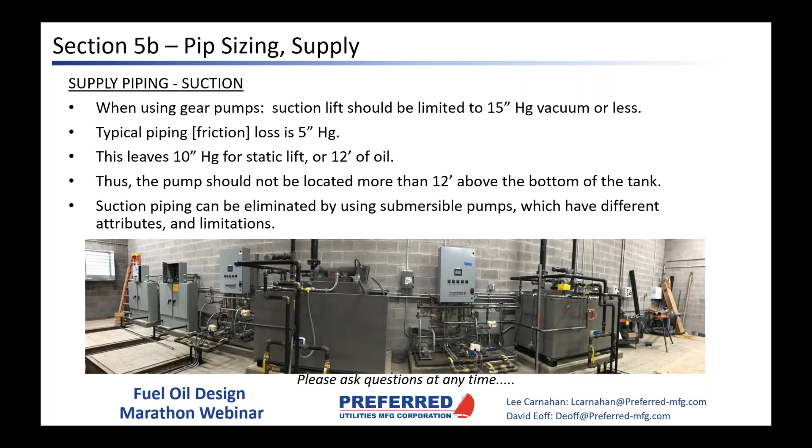To go through it with the engineer. Suction piping can be eliminated by using submersible pumps, which, as we've discussed, have different attributes and limitations - high flow, low head, etc. So again, it depends on the particular situation.

On the discharge side, we want to use flow switches on the discharge of the pumps, but sometimes we'll put them at the day tanks instead of or in addition to. I prefer in addition to, to confirm the transfer system is functioning properly. If there's a piping problem and we only have a flow switch on the discharge, that doesn't tell us if somebody broke the pipe out of the day tank. So it's a good consideration, especially on long supply line systems, to have a flow switch at the day tank as well.

One thing I see is that fuel loops are more common than necessary. Dave touched on this before when talking about boiler systems with back pressure regulating valves, because you sometimes have to maintain up to 100 psi to supply a boiler loop. I see systems from time to time that are looped with a back pressure regulating valve, but typically on generator systems, they're just filling atmospheric day tanks, so there's not really a reason - unless you're using something like a flooded supply header - to loop the fuel lines and have a back pressure regulating valve.

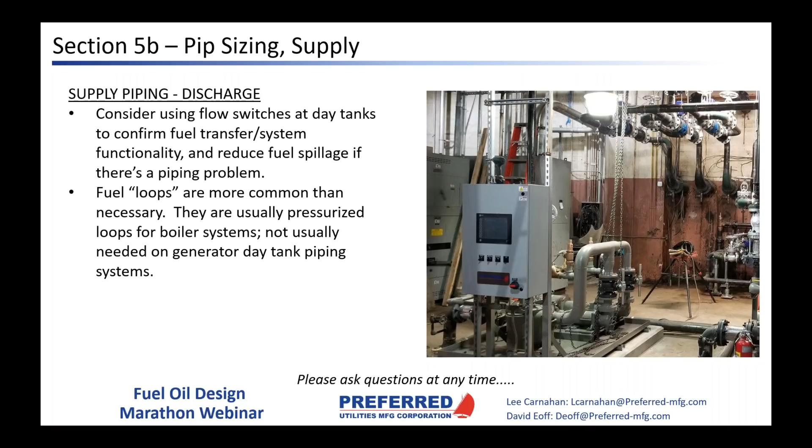With prudent design, let's say you've got a 3-inch supply header, one size up I could do a 3.5-inch return pipe. But if I've got 12 generators pumping this tremendous rate of fuel to these 12 different generators, I'm not going to feel comfortable with that scenario without return pumps. I'm going to potentially overwhelm that gravity return without using return pumps.

Every scenario needs to individually be looked at. I think it's really good that they're requiring people in New York to show their work, because you could have one generator or you could have 15, and that's going to make a big difference on the one-size-up rule. I would definitely be using return pumps in any situation like that. There's no question.

But if you go looking through NFPA, you're not going to find a mention of return pumps. Yeah, it's interesting. I think we talked about this whole slide pretty much.

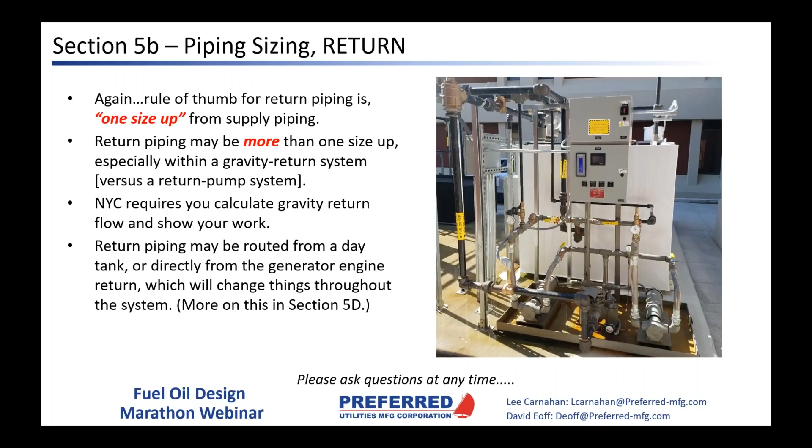And this one as well, for the most part. Flow restrictors can save you a lot of money and a lot of space on not having huge return pumps on a multi-generator system, especially on a multi-generator system. Flow restrictors will save a lot of space, effort, and cost.

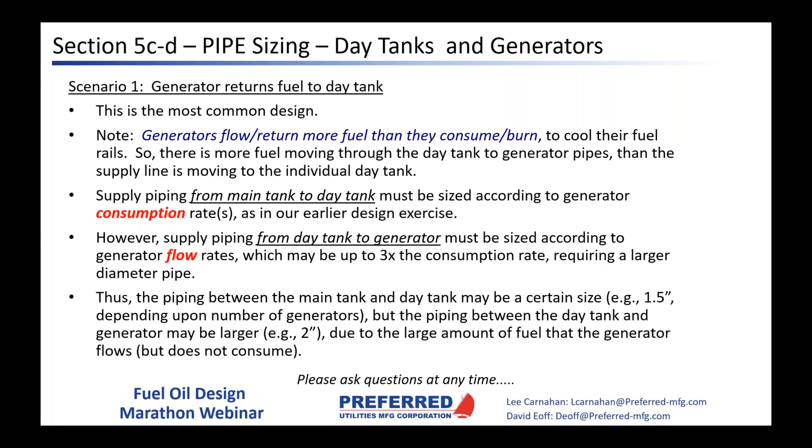We talked about most of this when we did the flow schematics. Flow versus consumption - just make sure that you're sizing correctly. You talked about level bouncing. The main thing here is to make sure you're sizing for consumption when your generator is pulling and returning between the day tank, and size for flow when returning fuel from the generators directly to the main tank. Considering generator fuel pumps can be 3 to 4 times consumption, it can get you into some very large supply pumps if you return directly to the main tank.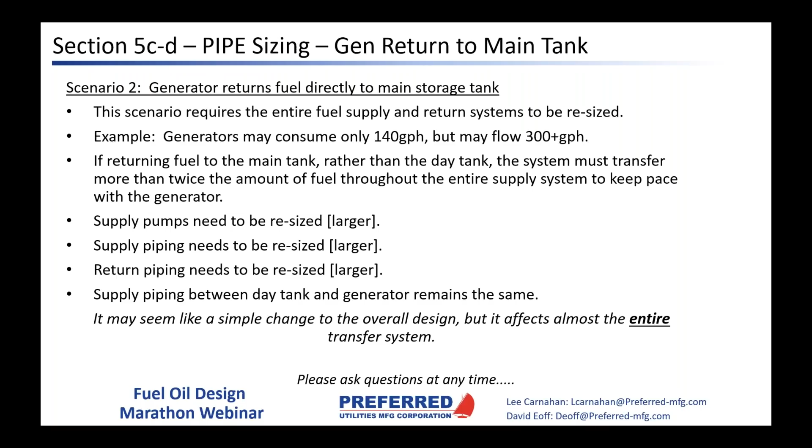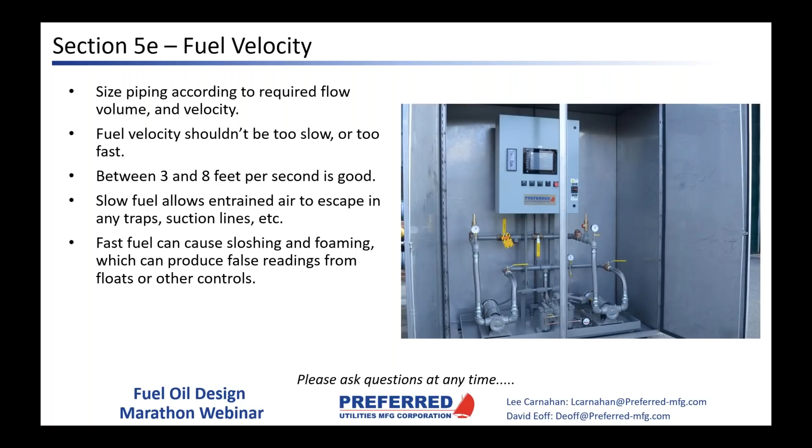So in most hot climates, we're going to do level bouncing rather than return directly to the main tank. The only exception I can see to that is Los Angeles, where you're limited to 60-gallon day tanks. We talked about fuel velocity as well, trying to keep it between 3 and 8 feet per second. So we're trying not to be all that repetitive here.

All right, this is all new material here. Yes. So do you want to talk about the valve types? Sure. Lee's talked a little bit about foot valves.

They go at the bottom of the main tanks and sometimes in the day tanks. The foot valve is like a check valve in that it keeps oil from flowing backwards and losing prime in a suction system. They come in a single poppet and a double poppet configuration, and when you've got plenty of pump suction, we'll use a double poppet foot valve.

The overfill prevention valve, Preferred makes 2 types: one for pump tanks and one for gravity tanks. Essentially, these are toilet float valves, exactly like the valve in your toilet - when the water level gets up to a certain point, it shuts off the oil. These are physically installed in the tank and shut the oil off usually around the 95% level, but in most jurisdictions, alarms go off at the 90% level. A responsible truck driver, if he gets to 90% and the customer wants more fuel, will go very slowly and watch it closely to make sure he doesn't overfill. The one on the left really looks a lot like the newer toilet float valves - there's a little float assembly that connects to a linkage that closes off the line so that when you get up to that level, no more oil enters the tank.

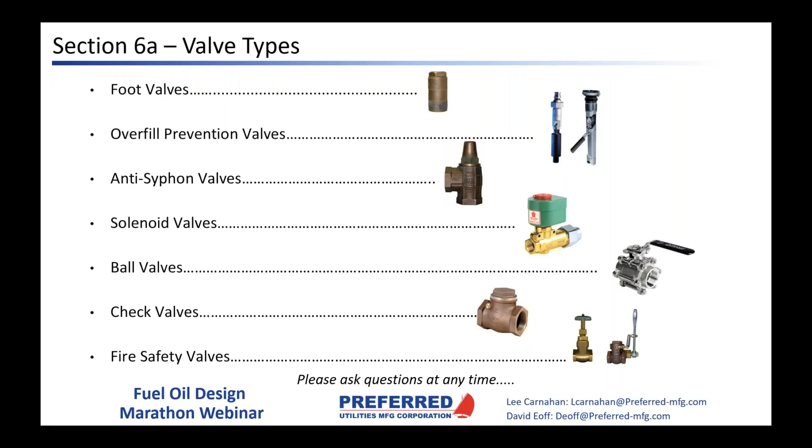Back pressure regulating valves, we don't often need them in generator fueling systems, but we will typically always have them in a boiler loop. The back pressure regulating valve is sort of the opposite of a traditional PRV.

A PRV senses and modulates to maintain downstream pressure, whereas a back pressure regulating valve senses upstream pressure and allows fuel to go through the valve to maintain upstream pressure.

So they're a little bit like a relief valve, but a relief valve is just open-close over-pressure prevention, while a back pressure regulating valve modulates to maintain upstream pressure.

So you put it at the end of your boiler loop, and the output of that valve really becomes the beginning of your fuel oil return line. The pressure requirements for boilers can be difficult to figure out because some boilers have onboard pumps and some don't.

The requirements for those pumps are different from manufacturer to manufacturer. Like the pumps on generators, the pumps on a boiler can flow a lot more than boiler high fire consumption. So if you're not sure, just let us know.

We know a lot of the burner manufacturers. We're a burner manufacturer ourselves, and we sell controls to all the burner manufacturers, so we usually know somebody we can call.

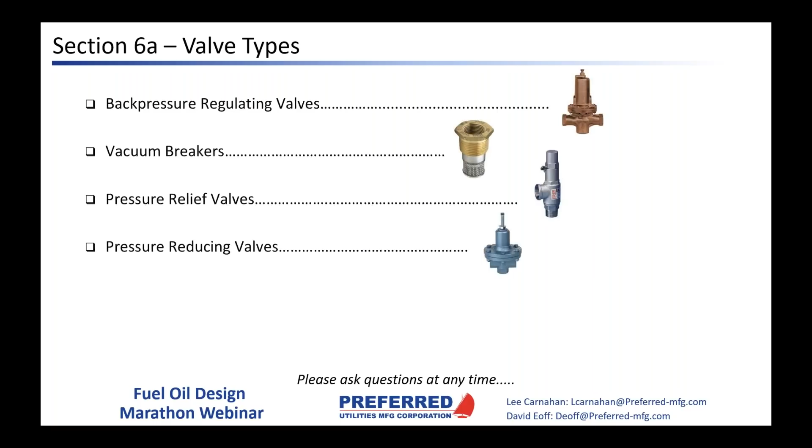We did this slide, I think I talked about most of this already. Most common is solenoid valves, but we like motorized valves when we can specify them because they're tight shut off, and we get proof of open and proof of closure switches.

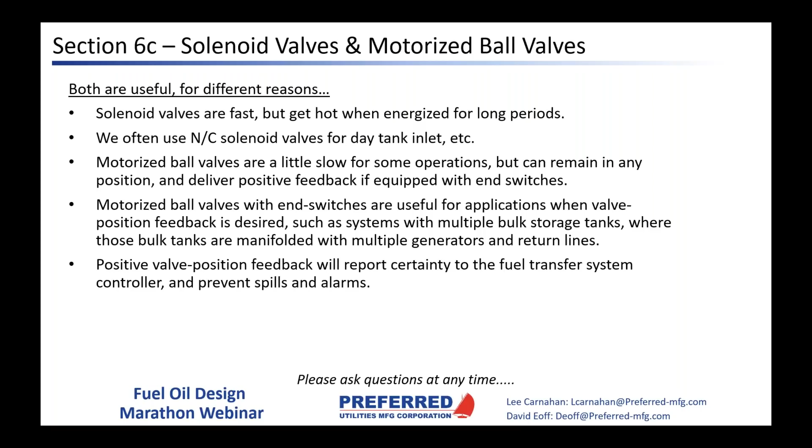And for those of you still hanging in there, we appreciate it. A lot of this stuff will go a little bit quicker because we've touched on a lot of it already, so it should go pretty quick.

I think we've talked about all the different types of spill containment and leak detection. You've got float switches, you've got the HDA2s that do discriminating leak detection. They use a combination of an optical sensor and a conductivity sensor to tell you whether the leak detected is oil or water. In California, Lee does a lot of vacuum leak detection systems where you pull a vacuum on the interstitial of the tank and the double wall piping, and any loss of vacuum is interpreted as a leak. Preferred has a monitoring system for those.

We also do cable leak detection in partnership with Permapipe, where we've put their PAL-AT controller in our pump control system. These systems are pretty cool because if you get a leak, it takes a map of your system and can pinpoint exactly where the leak is.

And then it maps that. Every once in a while it'll refresh that map so it'll tell you, you may have had a point leak at 137 feet. The next time it maps, it might tell you your leak is now 135 to 139 feet. So not only does it tell you where to dig, it can also tell you how bad your leak is by telling you what the limits of it are.

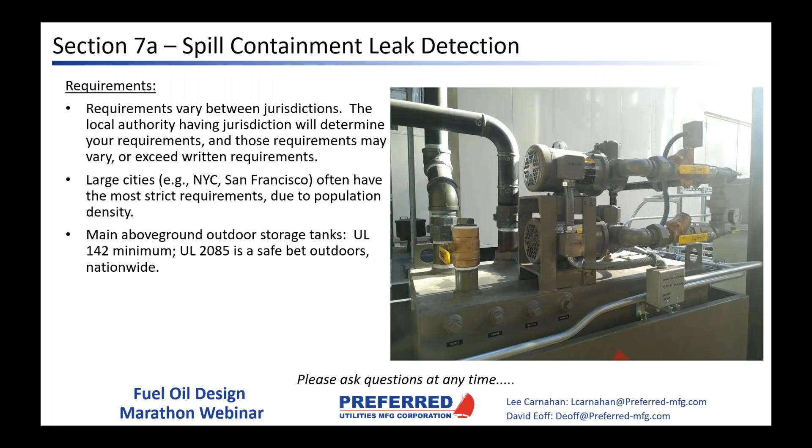It's a cool system. It's been around forever, but now you can get it incorporated into your preferred pump controls as well.

Another very common question is, how many vents do I need and where can I run them? That's another question for the fire marshal. Lee, you're pretty comfortable with that question in California, and it's different in San Francisco and Los Angeles. But if I were designing a system in one of those areas or New York City, I think that's something I would get the fire marshal to okay before we start cutting holes in buildings. Do you agree? Yeah, yeah.

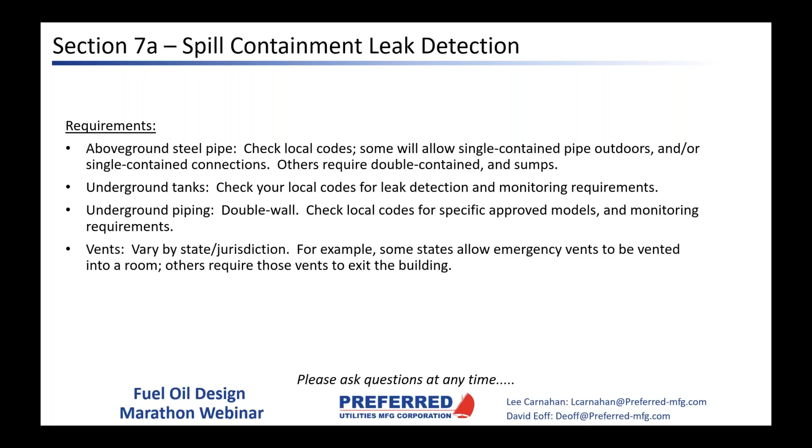They even have rules on where you can terminate the vents. They can't be close to air intakes, and they can't be close to windows. They need to be 12 feet above local grade, away from any kind of air venting, even in or out, and have to be away from windows as well, whether they operate or not. So that's something we look at on the projects.

Okay, so the different types of pump controls. The older way of doing this was with relay-based systems, and relays can be very, very reliable and repeatable. The biggest thing that can take down a relay system is that the relays can be pulled out of their sockets. An operator or facility person might pull a relay out of its socket because it's buzzing, and now you've changed the logic in the system.

I'm old enough to remember when we used to do flame safeguard systems with relays, and they were big, massive panels, and you couldn't change any of the logic.

What we find a lot is that we're told to design the pump controls around a certain number and type of inputs and outputs, and then when the system gets out into the field, we find there's another leak detector here that we didn't know about, or we thought we were going to have manual tank select valves but somebody's provided automatic tank select valves. So it's very common for us to have to do a program change. For that reason, Preferred's almost 100% now microprocessor controls, and they're programmable, because more often than not, our fuel oil startups start with a program change, because the IO in the field is a little bit different than what we were told.

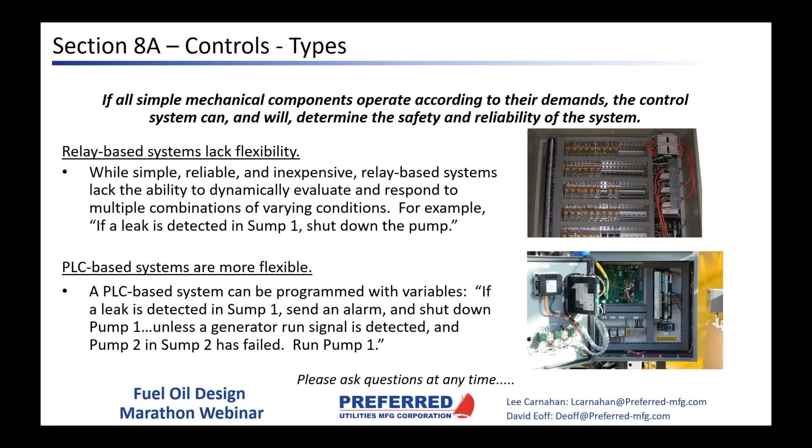By the way, this lower right-hand picture, that green board in the top left is the PermaPipe or PermaAlert PAL-AT board. They fit it right into our pump set enclosure. And that processor on the right is the preferred FSC processor that we use on virtually all of our fuel systems.

With microprocessor controls, you can get any sequence that you want. We feel our sequences are the safest because we do hundreds of these fuel systems every year, and most of the people in our engineering group in fuel oil have worked for the company at least 25 years.

So they've seen thousands of fuel control systems. It's a little like my first parent band trip meeting, where the teacher said some of these rules seem bizarre, but there's a reason for every one. When I came from boiler controls to preferred pump controls, some things seemed bizarre, but it turns out there's a good reason why we do them the way we do - the other way just isn't as reliable.

I can give you examples, but we're running out of time. We're also open to custom sequences. If it's not a safety related thing, we can custom program a fuel system to work the way you want. If you ask us to do something we think is not safe, we're going to push back pretty hard.

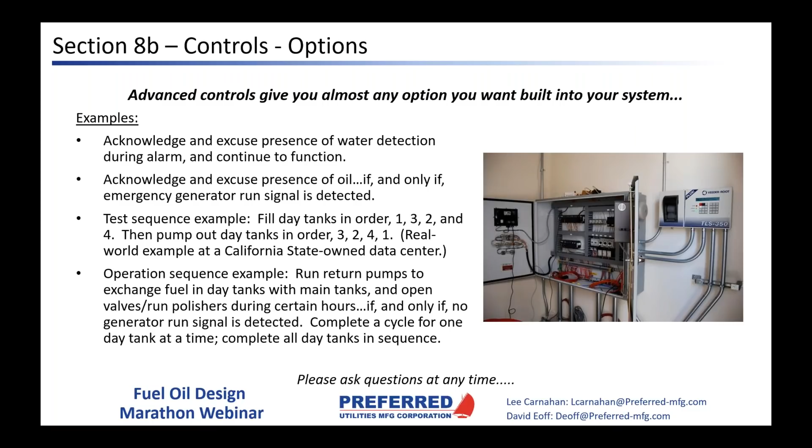Every component in a fuel system is a safety device. Not only have we thought out the pump controls, we've also thought out all the different failure modes - for instance, all of our leak detectors are made in the down position.

So we don't have an alarm that goes off when we detect a leak. We have a contact that continuously tells us we don't have a leak. If we ever lose that contact, or lose that voltage on the digital input, then the alarms go off and we say we have a leak.

The reason for that is in an energized-to-alarm type circuit, any kind of failure that de-energizes that circuit means you won't know if you get a leak. Let's say you have an energized-to-alarm system and you blow a fuse, or a wire isn't tightened down in a terminal block - you're going to have no voltage on the digital input, and that's normal. Then when you get a leak and that contact closes, you're still going to have no voltage on that terminal, and you're not going to know you had a leak.

So the way Preferred does most of these safety devices is we are continuously proving the normal condition through a normally closed contact. We don't wait for an upset condition to energize an alarm circuit, if that makes sense to you.

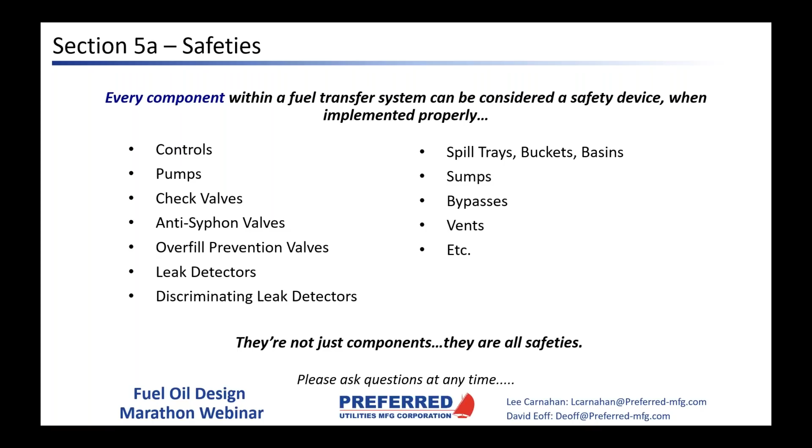We talked about this - we talked about day tank capacity. We're down to 15 minutes left.

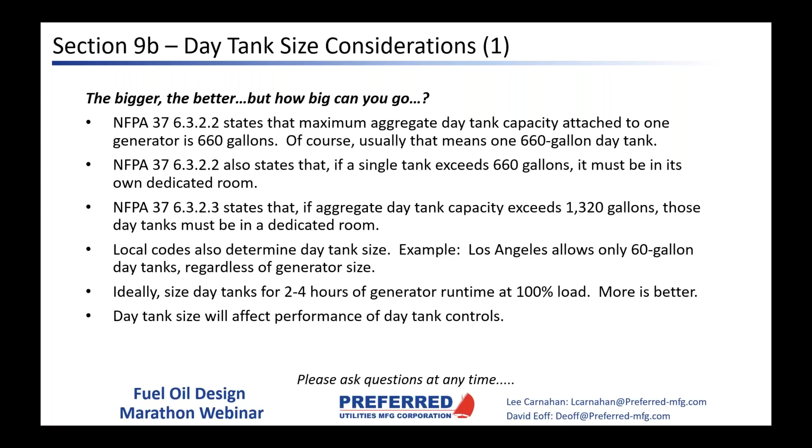Yeah, we've gone over a lot of this, but this is really the end anyway. So we're pretty much ready for questions at this point.